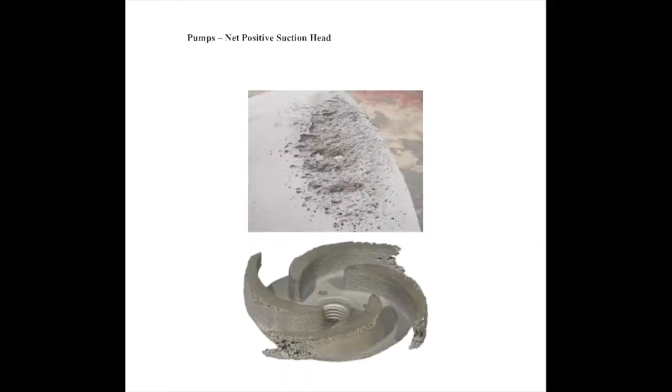In this video, we'll talk about net positive suction head for pumps. It's related to whether or not the pump is going to cavitate, and we'll talk about what that means in just a moment. Take a look at your screen—you'll see a pump impeller that has been subject to cavitation.

You can see the impeller down here, but you'll notice that it looks like the edges on the impeller have been eroded away, quite significantly in this image. This image on top is of another pump impeller where again you can see a tremendous amount of cavitation damage that's occurred. Keep in mind these impellers are made from solid metal, so they're very strong, rigid pieces of material. So this is quite a bit of damage that's been done to them, and this is cavitation damage.

So what cavitation is, is when liquid turns into a vapor. Instead of by increasing the temperature, which would be boiling, we turn the liquid into a vapor by decreasing the pressure, which is what we call cavitation. So it's effectively like boiling liquid, but doing so by lowering the pressure rather than increasing the temperature.

What ends up happening is you get your liquid going over the impeller blades. Showing the picture down here, the liquid would come into this impeller at the bottom and then get flung out to the sides.

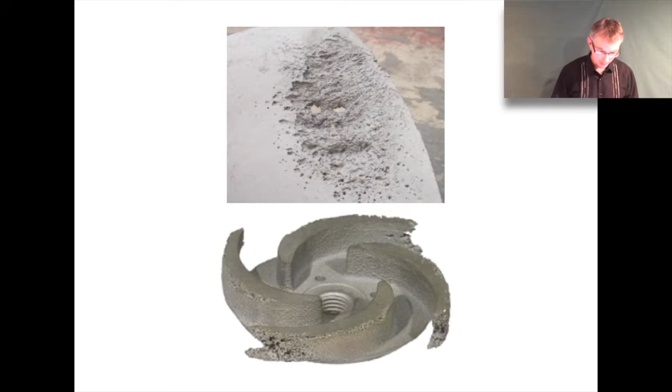And because of the curvature, this section of the impeller blade will be a low pressure region, or we call that the suction side of the impeller. That'll have a low pressure, and if the pressure is low enough, you can get cavitation occurring in this region.

What will end up happening is the liquid will turn into a vapor here, and that vapor will move further downstream. That little vapor pocket will move into a region of higher pressure, at which point that vapor pocket will collapse.

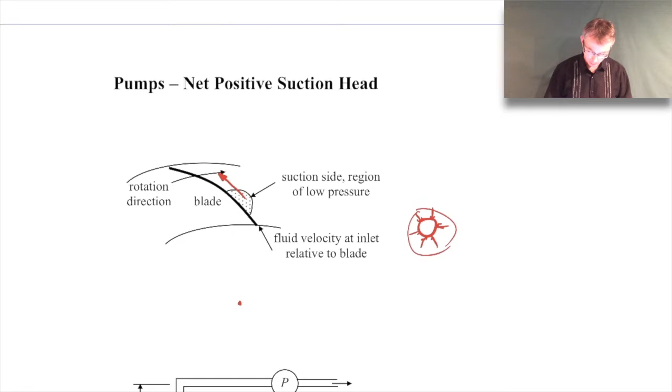That collapse can occur very violently, so violently that you can get a shock wave that actually forms from it. So if you imagine a vapor bubble here, it starts to collapse inward because it's turning from vapor back into a liquid—it can collapse so violently that you get a shock wave that forms and propagates outward and impacts on the surface of the blade.

That can cause some structural damage to it, break off a little piece of material. Actually, what commonly occurs is that the bubble collapses in an asymmetric way, so you get a bubble that forms with a jet. I'm drawing this sort of poorly here, but the bubble's forming, and then you'll get an asymmetric collapse.

So this is the vapor in here. You'll get an asymmetric collapse, and the jet of water will collapse and produce a very strong jet of water in a localized region, and then that will impact on the blade surface and cause some erosion.

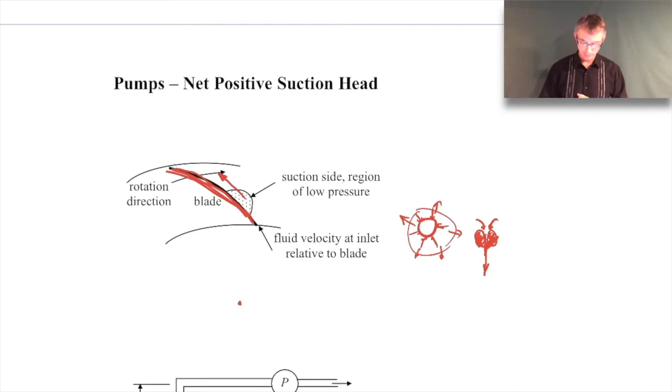So when the vapor pockets form, that's not so much of a problem, but when they move downstream and collapse, that's where you get a lot of damage occurring. You can see that a lot of the erosion is actually occurring on the very downstream side of the impeller blades where the vapor pockets collapse.

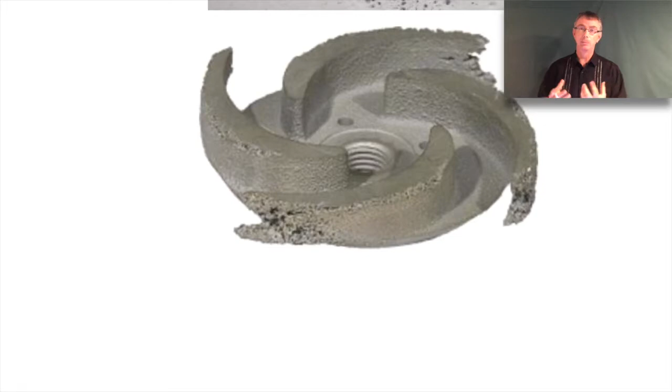Like I said, the shock wave and the water jet can erode some of the material, and over time you can see the kind of damage that occurs. So it's a big problem. Not only does it erode and damage the impeller, but it can decrease the performance of the pump.

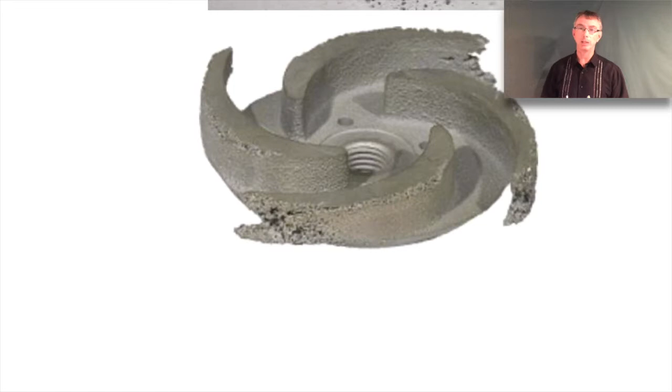The other thing is it causes a lot of vibration in the impeller, which can fatigue bearings and things like that. So that's a problem, and it can create noise, which is also a problem. There may be applications where you just don't want to generate a lot of noise, like on a submarine for example, so you don't want to have cavitation occurring.

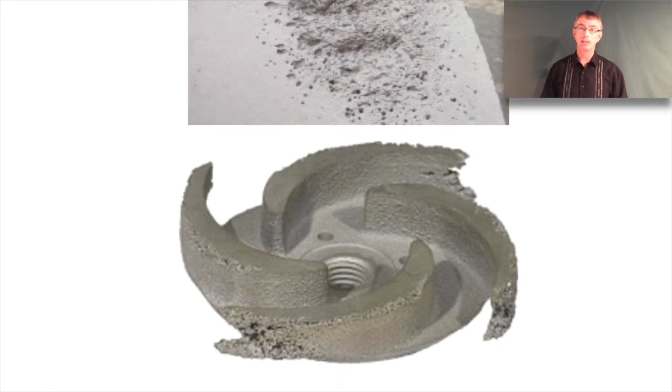So lots of reasons why you don't want to have your pump cavitate, so we try to find ways to avoid that. It's related to the pressure generated on the suction side of the pump. We want to make sure that pressure doesn't drop below the vapor pressure of the liquid. So there's a quantity we use to quantify whether or not a pump is going to cavitate, called the net positive suction head.

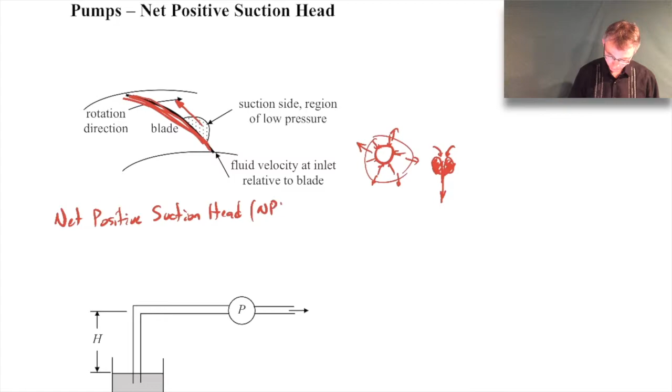Let me find some space to write that down. NPSH stands for net positive suction head. Kind of a long name, but everyone just calls it NPSH. There are actually two kinds of NPSH we're going to talk about: NPSH required and NPSH available.

The NPSH required, or NPSHR, is a property of the pump. It's the amount of net positive suction head the pump needs in order to avoid cavitation. The NPSHA, or NPSH available, is a pipe system property. It's how much net positive suction head the system can provide to the pump. And what we want is the NPSHA to always be bigger than the NPSHR to avoid cavitation.

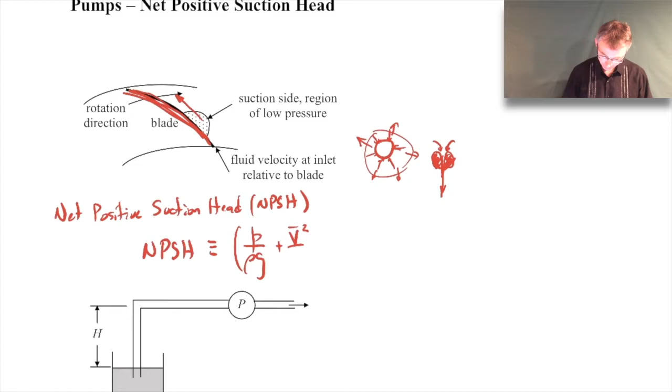I'll repeat myself here like I normally do, and I'll write it down. But let me first define what net positive suction head is. NPSH is defined as the pressure head and the velocity head at the suction side of the impeller, minus the vapor pressure head. That's the definition of the net positive suction head.

So the idea is this: when we have our pump, imagine a coordinate system with the origin located at the pump impeller, right in the middle, so we don't have any elevation head to worry about. This quantity is then the total head available at the suction side of the pump. The suction side is the inlet of the pump, where the pressure is typically lowest.

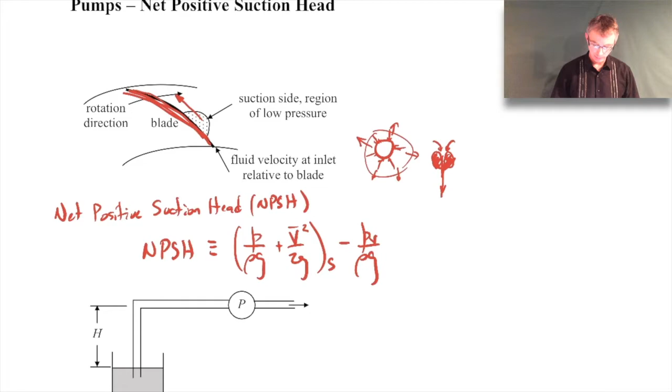So on the picture below, if we have this pipe system, the suction side of the pump would be right there, right where the inlet is. That's assuming the flow is going this way. So that's where we're evaluating the pressure and velocity heads, right at the suction side.

Another thing I should mention is we just assume the flow into this pump is turbulent, so you don't have to worry about the kinetic energy correction factor there—it's just assumed equal to 1. So here's the suction side of the pump head, and this is the vapor pressure head. PV is vapor pressure.

For whatever liquid you're dealing with, keep in mind that when you look up the vapor pressure value for something like water, it's typically given in terms of absolute pressure. So you need to make sure when you evaluate the total head at the suction side of the pump, that pressure is also in terms of absolute pressure. You just want to make sure this pressure and the vapor pressure are either both absolute or both gauge pressures. Typically, they're absolute pressures.

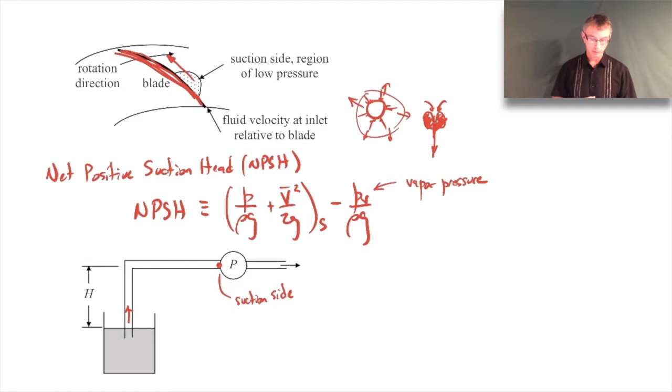So I mentioned we have two different kinds of NPSH. There's NPSHR, the required—let me write this a little differently. This is the NPSH required by the pump to avoid cavitation. That's a pump property.

When we talked before about the head performance curves for pumps supplied by the manufacturer, the NPSHR curve is also provided by the manufacturer, and typically it's just found experimentally. I'll say in a moment how you'd find that experimentally. So it's just a property of the pump provided by the manufacturer, typically found experimentally.

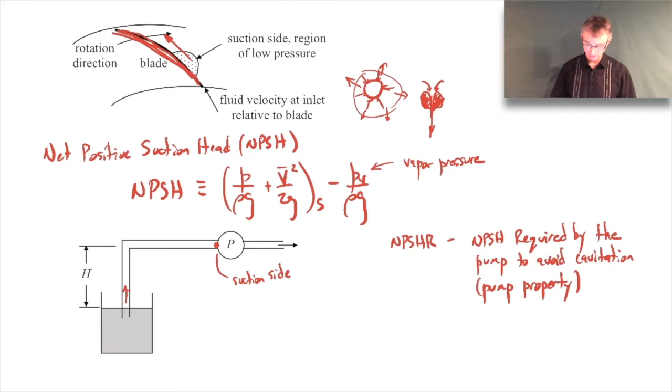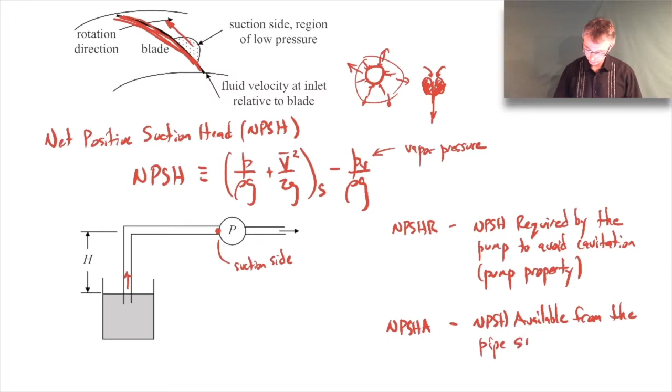Then we have the NPSHA, the NPSH available from the pipe system. This is a pipe system property—it's independent of the pump. This is the NPSH that the pipe system provides to the pump, and we find it via the extended Bernoulli equation.

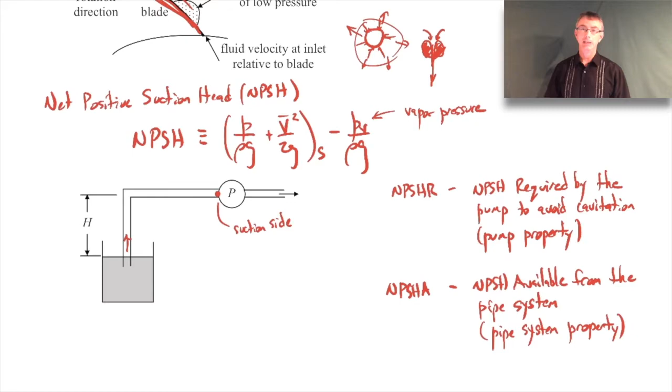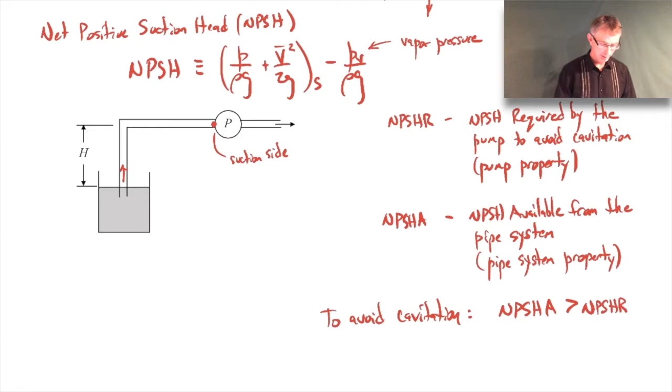I'll do a quick example to show you what I mean. So this is a pipe system property, the NPSH that the pipe system provides to the pump. In order to avoid cavitation, what we want is the NPSHA to exceed the NPSHR. We want to make sure that what's made available by the pipe system is more than what's required by the pump.

Okay, so the NPSHA is something we calculate based on the pipe system. It'll vary - if you have a pump, it'll have an NPSHR, that's a property of that pump, but the NPSHA, which is a pipe system property, can vary depending on the kind of pipe system you have leading into the pump. It all depends on the pipe system, what kind of valves you have, what lengths of pipe you have, the elevation changes, etc. Those will all affect the NPSHA.

We just want to make sure, to avoid cavitation, that NPSHA is greater than NPSHR. That's a really important thing. Now, normally there's a bit of a safety factor - the typical recommendation is to make sure NPSHA is not only bigger than NPSHR, but you want to put in like a 10% cushion as well. And if it's a critical application, you might even want more than that. You don't want it to be right on the edge of cavitating. You really want NPSHA to be much bigger than NPSHR, if at all possible, just to keep you far from the possibility of cavitating.

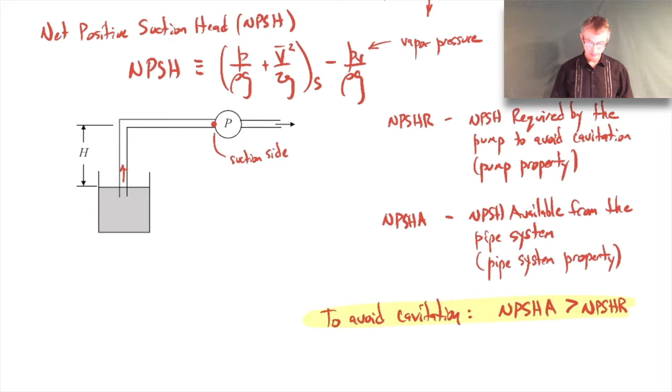So let me go ahead and show you how we would calculate the NPSHA for a particular pump system. Let's say we have this system shown here. We're pulling water from some reservoir through a pipe system and through a pump and on out. And the pump is located a height h above the reservoir.

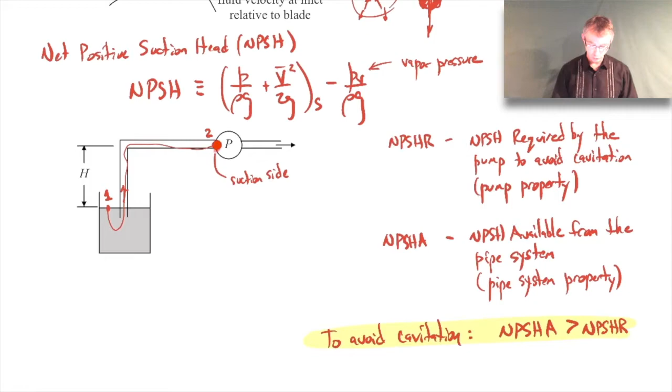So to calculate the NPSHA, we'll make use of this definition for NPSH, and we'll use the extended Bernoulli equation from point 1 here on the free surface. We'll follow some stream tube that ends up at point 2, right at the suction side of the pump, just leading into the pump. Remember that NPSH is defined based on the conditions of the total head right at the suction side of the pump - that's why I'm ending point 2 right there. So we'll do the extended Bernoulli equation.

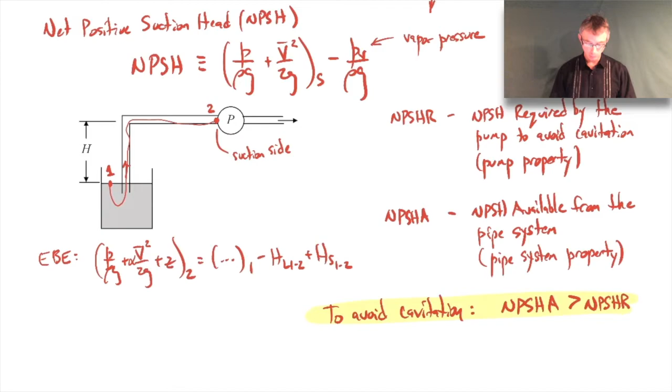Okay, so here's our extended Bernoulli equation between points 1 and point 2. Here is the total head at point 2, the suction side. Point 1 is right here at the free surface. This is the head loss between points 1 and 2 - I put the 1-2 here just to re-emphasize that. So, for example, we don't care about any losses downstream of the pump because that's not between points 1 and 2, only the head losses between those two points. And then this is the shaft head between points 1 and 2. Note that the pump is downstream, so we don't factor that into our shaft head term, because there is no pump between 1 and 2. The pump occurs downstream of point 2.

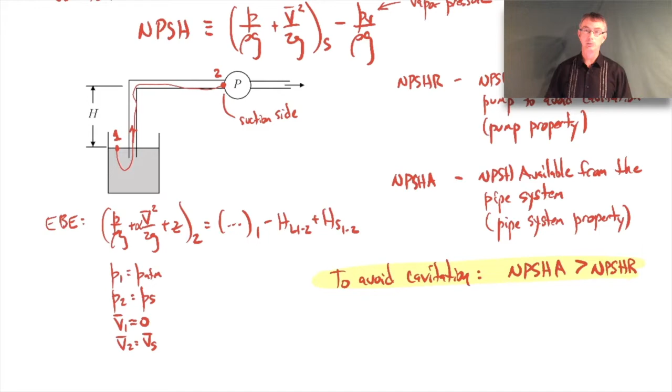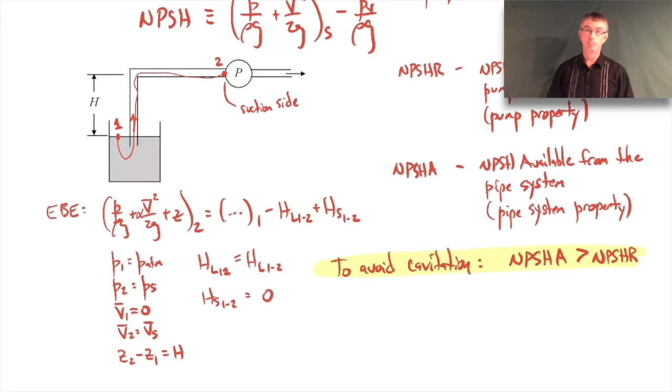So when we evaluate the extended Bernoulli equation: pressure at 1 will be atmospheric pressure. Pressure at 2, of course, is the suction side pressure - I don't know what it is, I just know it's the suction side pressure. The velocity at 1 is about 0, since it's a big reservoir, big tank, so the velocity is very small. Velocity at 2 is just, again, the suction side velocity - I don't know its value, it doesn't really matter, as you'll see in a moment. Z2 minus Z1 will be the height h, the elevation difference between those two points. HL 1-2, I'm just going to leave it as is - for this example I'll call it the head loss between those points. And the shaft head between 1 and 2 is 0, because there is no pump or turbine between points 1 and 2.

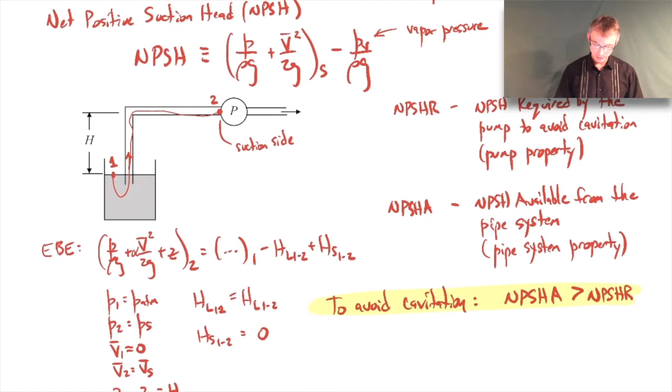Okay, so then what I'm going to do is rearrange this equation to make it look like the form for the NPSH definition. I'll have P over rho g plus - oh, and I should mention I'm assuming the kinetic energy correction factor is equal to 1, that it's turbulent in this system. So I'm rearranging the extended Bernoulli equation to make it look like this. Let me go ahead and do the algebra here.

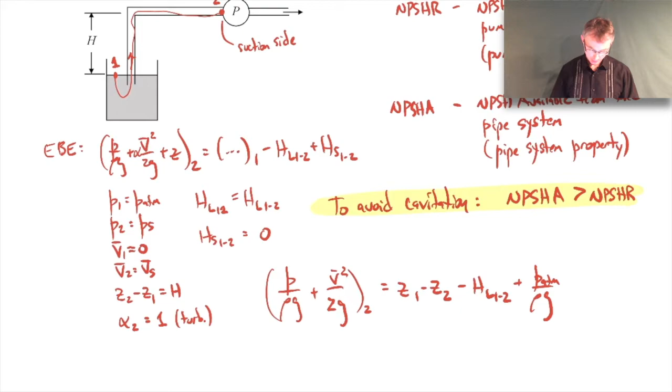Let's just make sure I've got everything. I think I have it all here.

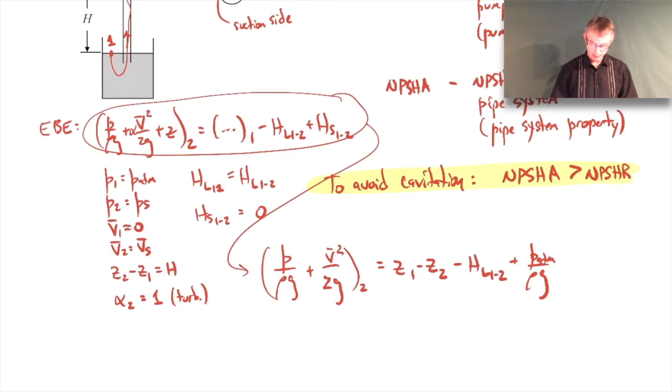So all I've done is I've just rearranged the extended Bernoulli equation. Let me circle it here, and I've rewritten it down here, trying to get it closer to the form of the NPSH definition at the top of the screen. So you can see I've tried to keep the left-hand side to look like that term. I still have a little bit more modification to get it to look exactly the same.

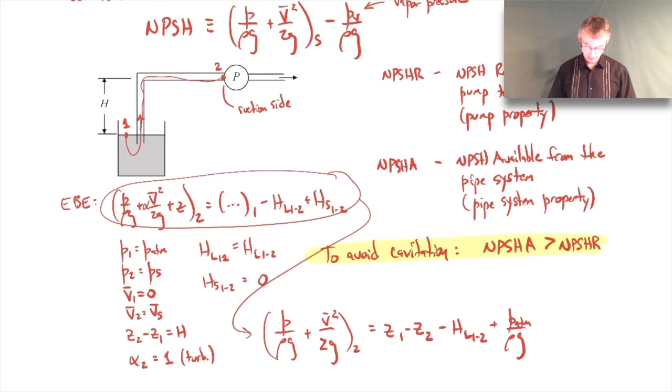Okay, and then here the P atmosphere was just the P1, and the head loss term is just right there. So let me do the final step.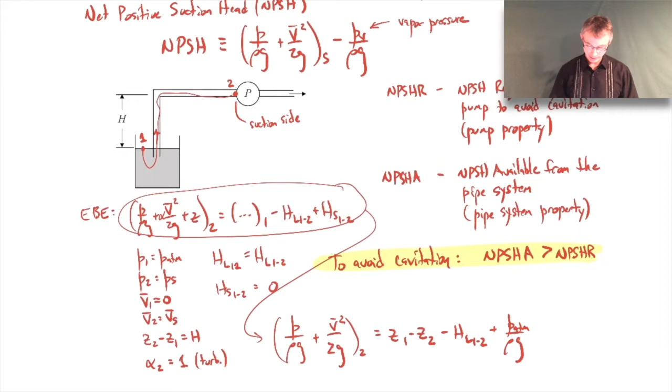What I'm going to do is subtract the vapor pressure from both sides, and then write Z1 minus Z2 in terms of the H given here. So we'll have P over rho g plus V bar squared over 2g on the suction side minus vapor pressure head. And then on the other side I'll have P atmosphere. I need to subtract out the vapor pressure on that side, just to keep my algebra correct.

And then I'm going to rewrite Z1 minus Z2, that's just equal to minus H. So there we go. And so now you'll see that the left-hand side just looks like the net positive suction head. Right? If you look at this, that's the net positive suction head.

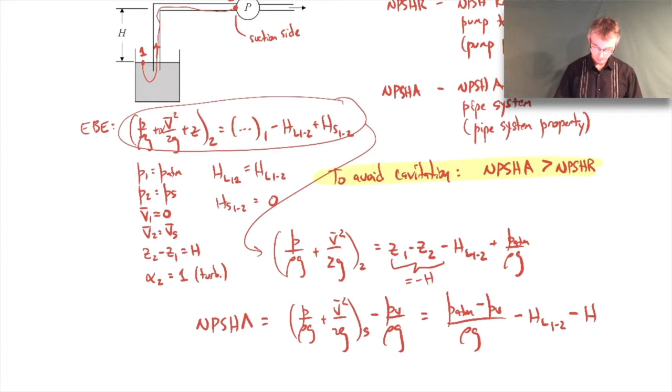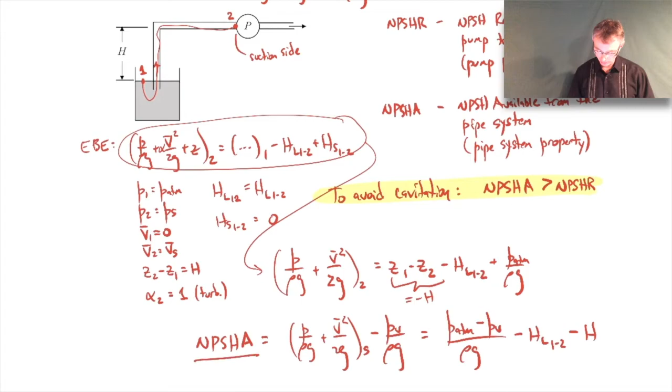And since I'm doing this for the pipe system, this is specifically the NPSHA, right? Because this is the pipe system property. So you can see the net positive suction head available is equal to the atmospheric pressure minus vapor pressure, turned into a pressure head quantity. Then we have the head losses, and then we have the elevation head. Okay, so this is how we calculate the net positive suction head available.

It's just using the extended Bernoulli equation. Now again, we typically want this NPSHA to be as large as possible so that we can ensure that we're always greater than the net positive suction head required. So to find this NPSHR for that particular pump, I would have to go back to the manufacturer's information for that pump and see what the NPSHR is for that. I'll come back to that in a moment.

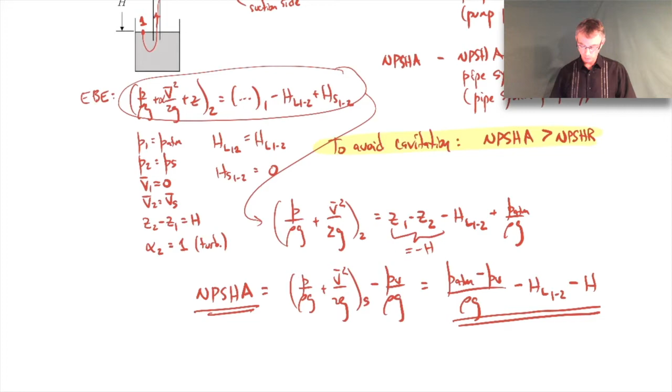So now looking at the NPSHA, just a few things stand out about this. Number one, you need to make sure you're using the same types of pressures here for the atmospheric pressure and vapor pressure. Don't use one as gauge and the other as absolute. Just keep them both absolute or both gauge. Typically vapor pressure is given as an absolute pressure, so you'd want to make sure both are absolute pressures there. Typically you don't have a lot of control over what the atmospheric pressure is.

You might have a pressurized vessel, like if I enclosed this vessel here in some dome and pressurized it, then I could change what the pressure at point 1 is, but often you can't do that sort of thing. The vapor pressure you don't have much control over either. It is a function of temperature, so you could change the temperature of the fluid, and that might affect the vapor pressure, but you don't have a lot of control over those things.

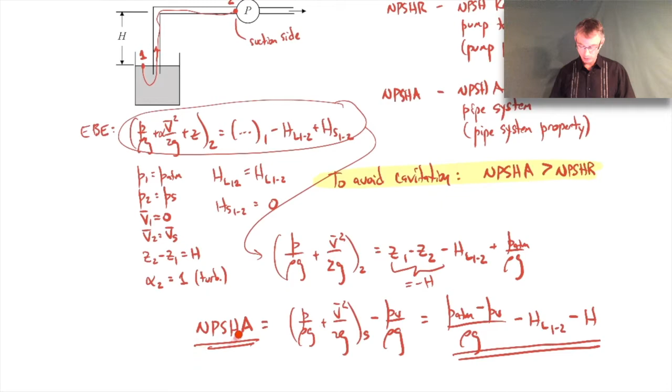Now the head losses, you do have control over. So ideally, again, you want to keep NPSHA large, so you don't want a lot of head losses because you see they subtract away. So you wouldn't want a long length of pipe. You wouldn't want to put too many minor losses in there because you want to keep this NPSHA large. So avoid head losses, and if you can avoid head losses, you keep the NPSHA large.

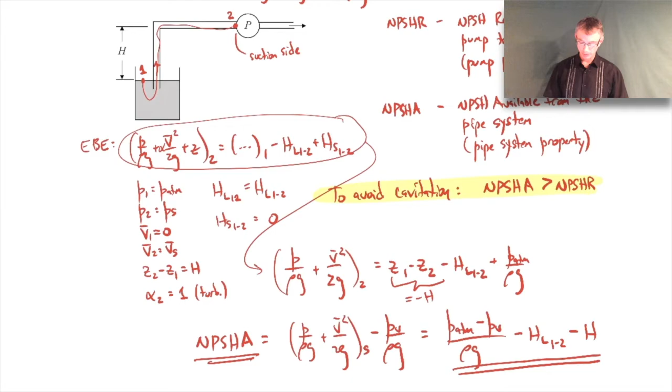The other thing is you don't want a big elevation difference, right? So here you see it subtracting away. So you'd want to reduce this elevation difference between the free surface and the pump. You don't want the pump really high, otherwise you're more likely to cavitate. So these are two things you do have a lot of control over: reducing the losses and reducing the height that the pump is above the reservoir. Ideally, you'd want the pump below the reservoir because then you would be adding to the NPSHA. It would actually add NPSHA in that case.

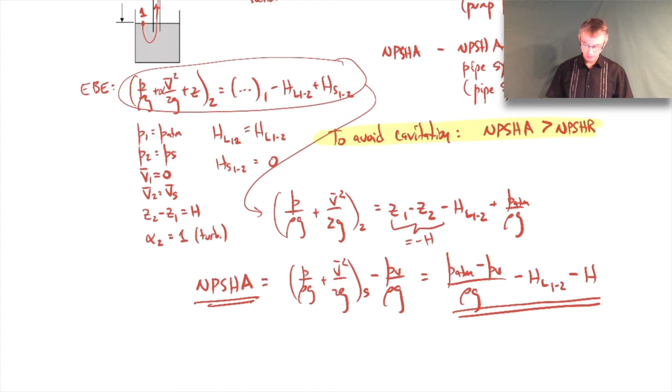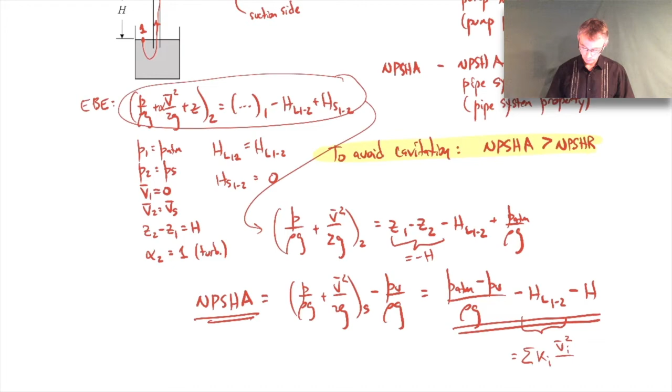Another thing you can see here is, remember that the head loss term looks like the loss coefficients times the velocity head where that loss is occurring. So if you increase the flow rate, then the velocity will increase, and then you will get less NPSHA. So increasing the flow rate through your pipe system will end up reducing your NPSHA, okay, because of this head loss term.

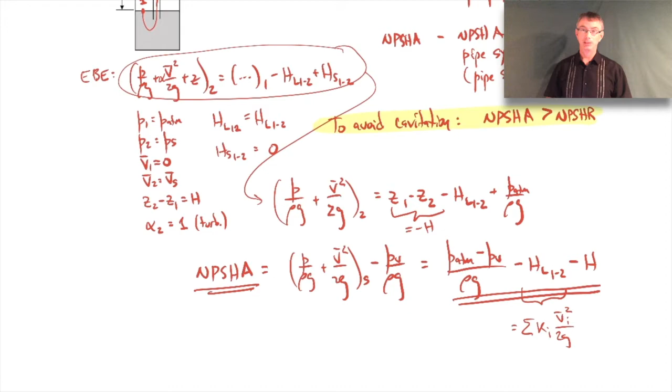So let me show you a tip. Hopefully all that makes sense, and now you know how to calculate NPSHA. It's very important to keep in mind that to avoid cavitation, you want the net positive suction head available to be larger than what's required by the pump. And what's required by the pump is a pump property, so let me show you a little bit about that.

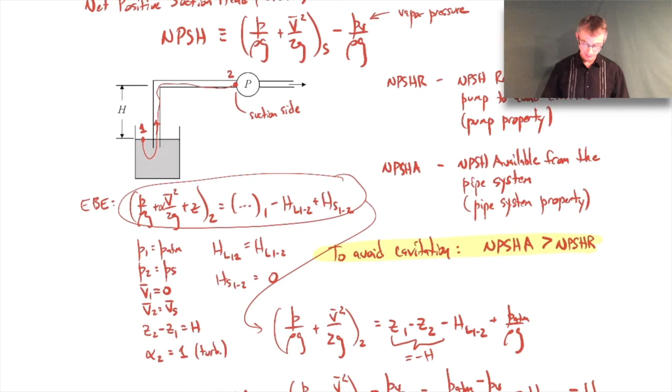Here's a plot from the internet of a particular style of centrifugal pump. You've seen these plots before. You have your head rise versus volumetric flow rate down here, and you can see the head curves for this pump at different impeller diameters. Then you see the efficiency curves as dashed lines, and these lighter colored lines are the brake horsepower curves for the different impellers and speeds. All these things are functions of the volumetric flow rate.

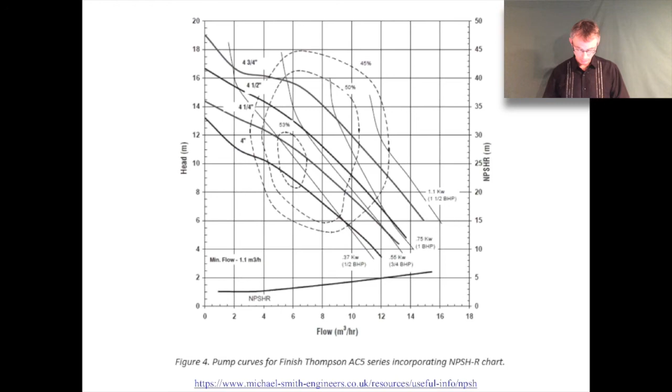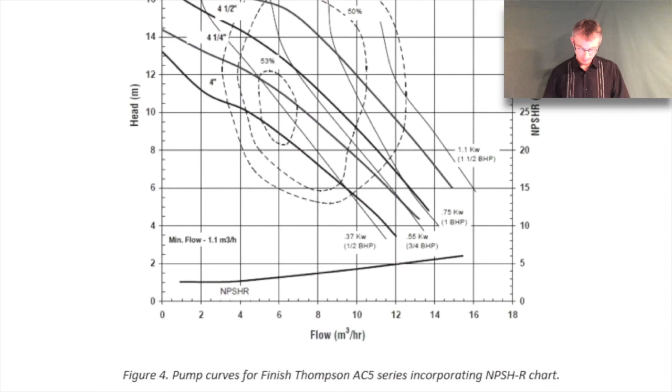But what I really want to focus on is this curve down at the bottom. You've seen this in other video lectures as well—this is the NPSHR curve for this pump. This is what the pump requires in order to avoid cavitation, and the values for this are given on the vertical axis on the right-hand side, in meters here.

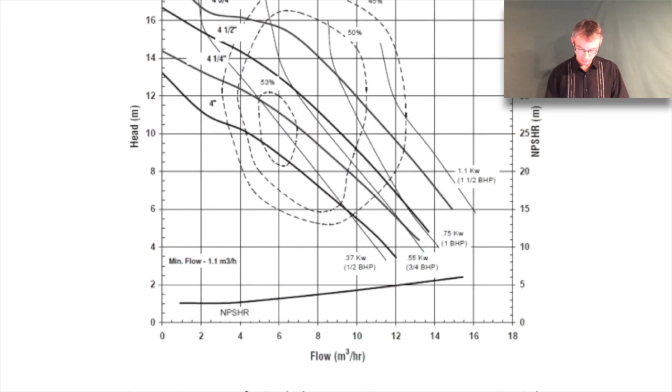So at a flow rate of, let's say, 10 cubic meters per hour, you'd want to make sure the net positive suction head available was at least bigger than a value of about 4. You need to make sure the NPSHA has a value bigger than 4 meters in order to avoid cavitation, and ideally you'd want it even more so you can stay far from cavitation. Okay, so that's how it works.

NPSHA is a property of the pipe system. You find it through the extended Bernoulli equation leading up to the suction side of the pump, or the inlet side. NPSHR is a pump property which you get from a plot like what you see on your screen.

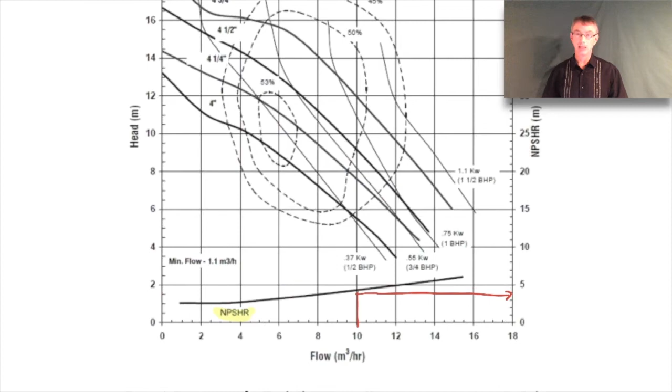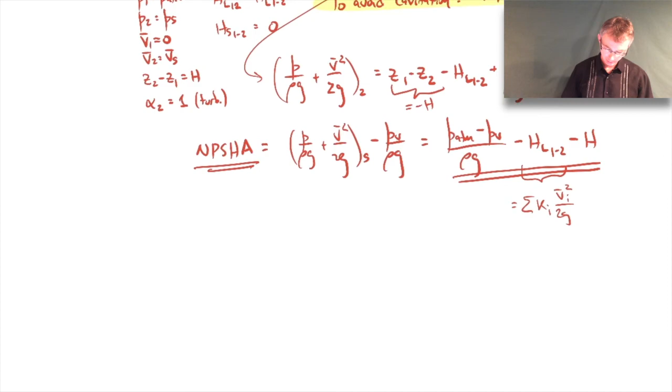So let me ask you a couple of basic questions. Let me go back up to the picture here. For this pipe system shown, what if I wanted to add a valve so I can control the flow rate? Where should I add that valve—upstream of the pump or downstream of the pump? Where's the best location in terms of avoiding cavitation?

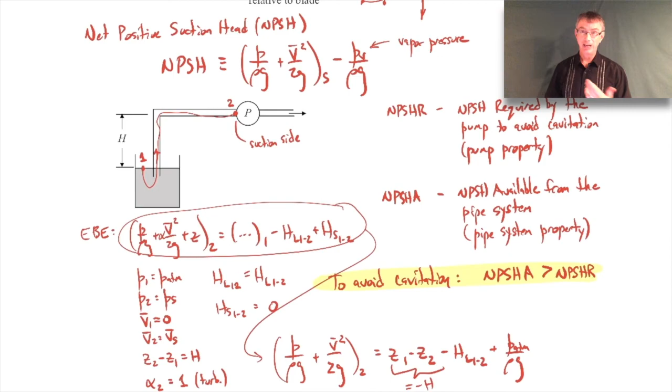It would be downstream of the pump, because if you put it upstream, valves typically have a large loss coefficient. So if you put it upstream of the pump, you're much more likely to cavitate it because you'll have a large head loss which subtracts from your NPSHA. So you don't want to have it upstream of the pump.

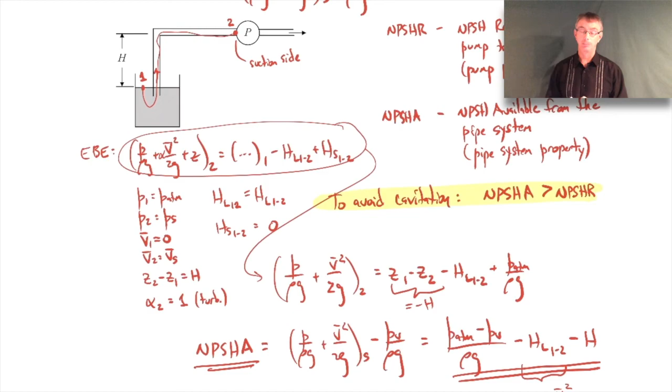Now, let's say I have the option to put the pump either up here, or maybe put it further down below the elevation of the tank—which would be preferable in terms of cavitation? It'd be preferable to put the pump down lower.

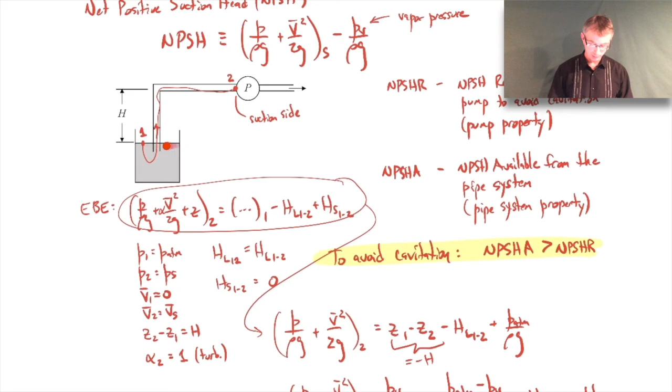If we can drop the pump below the free surface of the tank, then this H term will actually add to the NPSHA instead of subtracting from it. So generally, if you're trying to pump water out of a pit or something like that, you try to put the pump as low as possible, and it'll be more effective that way—you won't have to worry about cavitating it.

If it's up too high—say you're trying to pump water out of a pit and your pump is more than 33 feet above the free surface of the water—then you won't even be able to pump it, because you're relying solely on atmospheric pressure to push the water through the system. You're far better off keeping the pump down in the pit, or as low as you can get it, so you don't have to worry about cavitating the pump, and then you can supply a lot of pressure to pump the water over a long distance.

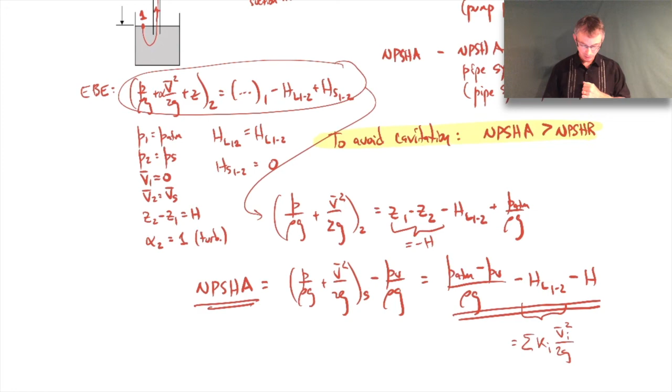We know from Bernoulli's equation that as you increase the flow rate, the pressure typically drops. If you rotate the impeller speed faster and faster, the pump is more likely to cavitate as well, because you drop the pressure over the suction side of the impeller. The faster the impeller rotates, the lower that pressure gets, and the more likely it is to cavitate there. So if you operate at a higher rotational speed, you're more likely to cavitate the pump. All right, I think that just about covers it.